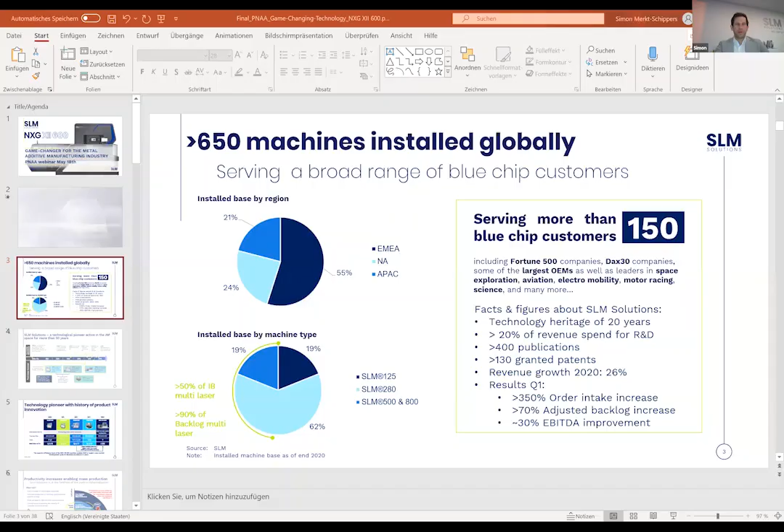Thank you very much, Brian. I'm very happy to hold this webinar to speak about our flagship. Let me share my presentation that I have prepared for today, and let's speak about our latest machine. You can see the slides.

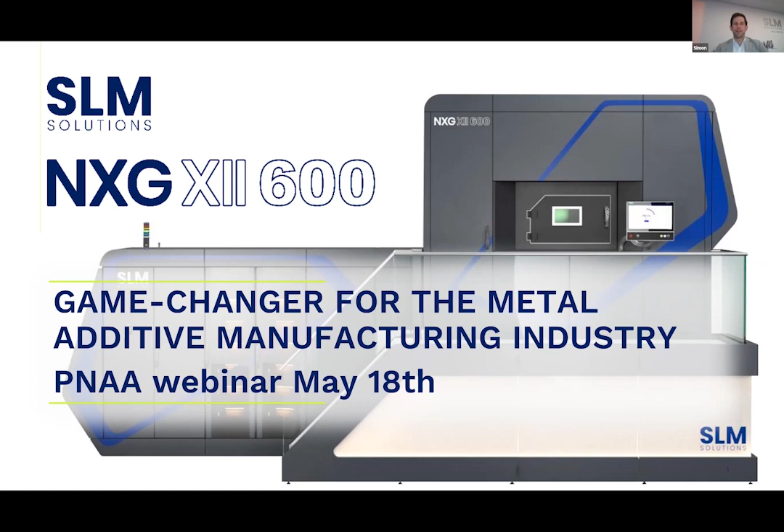I would like to start with a short video of the machine. It's a video that we showed during the launch event we did in November to present our new flagship to the world. So please enjoy.

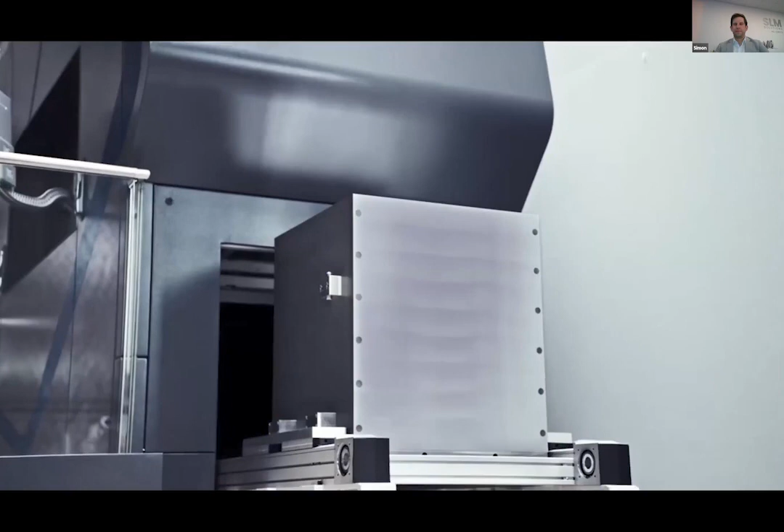All right, before we jump into the details of that machine, I would like to shortly introduce you to SLM Solutions. We are one of the leading metal AM machine manufacturers, providing machines for selective laser melting technology. We have around 650 machines installed globally, serving a broad range of blue chip customers from various industries, including aerospace customers like Rolls-Royce, Safran, Honeywell, and UTC Collins in our customer base, and we are very proud of this.

Some facts and figures about SLM Solutions: we are the co-inventors of SLM technology in the late 1990s, so we have a technology heritage of more than 20 years. We spend a lot of our revenue on R&D to keep our technology leadership. We have filed a lot of publications and been granted a lot of patents in the last 20 years to secure our technology leadership.

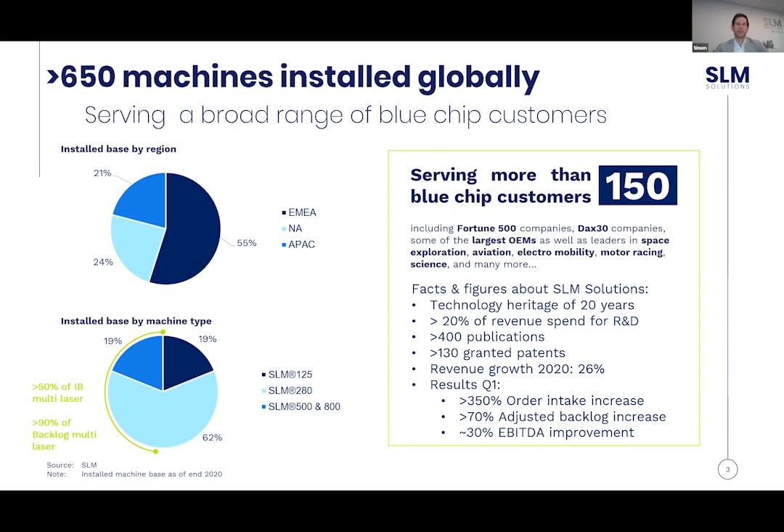This is our current product portfolio that we offer to the market. It's an evolution from 2009 to now. We have the SLM 280, a mid-size machine in our portfolio, which we brought to market in 2009 as a single laser machine. Then in 2011 we upgraded it with a twin configuration, equipped with two lasers. We brought the SLM 500, a machine with a larger chamber size, to market in 2013, equipped with up to 4 lasers working in parallel. Then in 2017 we brought the SLM 800, equipped with a large Z axis to print even larger parts. And our recent addition is the NXG XII 600, equipped with 12 lasers.

So it's really a large step towards more productivity, higher productivity, but also towards larger build envelopes, as this machine features a build envelope of 600 millimeters cubed.

For us over here on this side of the pond, that's about 2 feet cubed. Does that sound about right? 600 millimeters is about 2 feet. Cool, that's a pretty big size, a pretty good size 3D printed part. It's like an oven, like you'd have in your kitchen - the size of a big oven. So you can fit quite large parts into that machine, right?

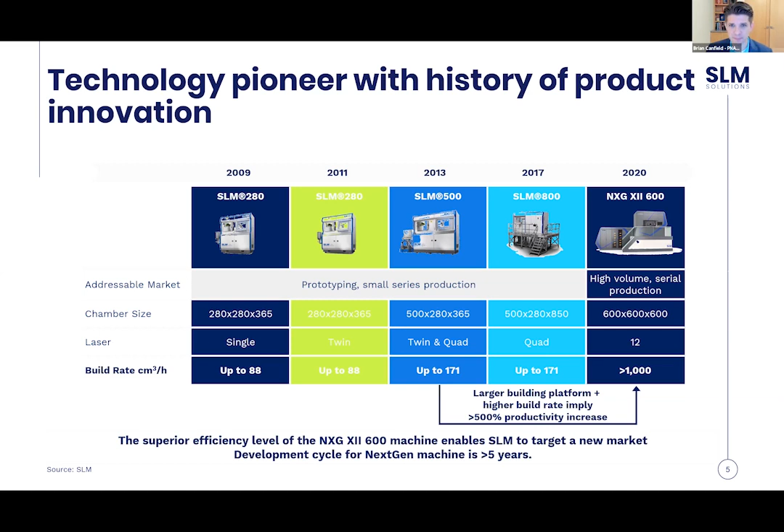Let's talk about a bit more detail on this machine. It's 20 times faster than a standard single laser machine, and 5 times faster than an SLM quad laser machine, which was, before we launched this machine, the most productive machine in the world. It's designed for serial production and optimized for large parts and high volume production. Each of the lasers has 1 kilowatt, giving a lot of opportunities to increase productivity by working with higher scan speeds.

So again, typical machines out in the market are equipped usually with 400, 500 or 700 watt lasers. Here we equip the machine with 1 kilowatt to get even more productivity out of the machine. There's also a new function that we introduced, a zoom function. So we have a variable spot size on this machine. We can vary the spot size on the fly, allowing you again to increase productivity of the process. So it's really a machine designed for serial production, and definitely the most productive machine in the market you can find.

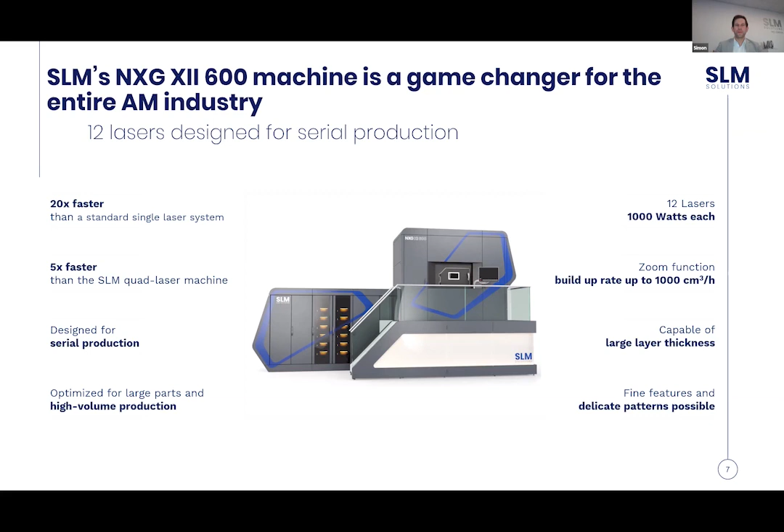Yeah, this slide also shows it. We have compared our machines with our competitor machines. You can see that here on the left side. Our competitors' machines in terms of build rate are typically below 150 cubic centimeters per hour. Our existing machines, the 500 and 800, equipped with a quad laser configuration, can already deliver quite high build rates of more than 150 cubic centimeters per hour. But if you look on the right side, the NXG XII 600 is providing a massive increase of productivity of 500% over the latest state-of-the-art machines, which is quite impressive.

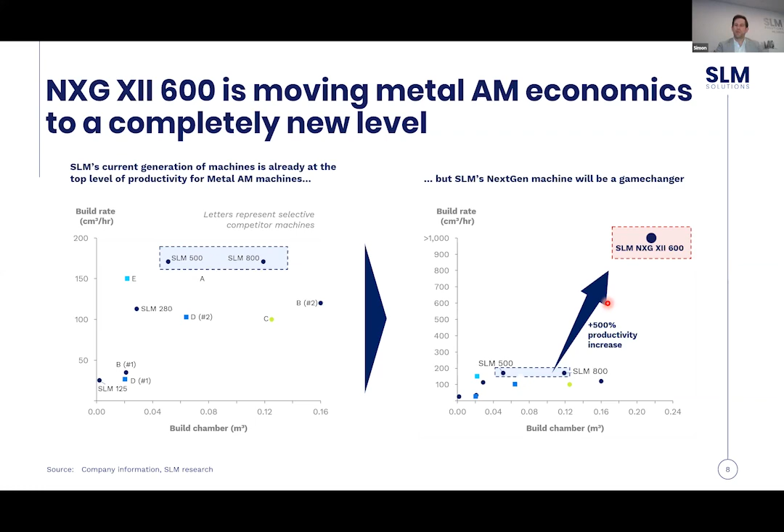This application was made from Inconel 718 material, a nickel-based super alloy that we can process perfectly in this machine. It has large dimensions, so it almost fills our complete build envelope. And we were able to produce this part in less than 70 hours, which is already quite a good result. We had a build-up rate of 207 cubic centimeters per hour in this case. We were not using the full laser power, only a 350 watt parameter set. So we expect much larger build-up rates, at least a factor of 2, if we use high power parameters like 750 watt or up to 1000 watts.

So this is quite a nice example from the aerospace industry, and we hope to get more of these kinds of applications from our potential customers.

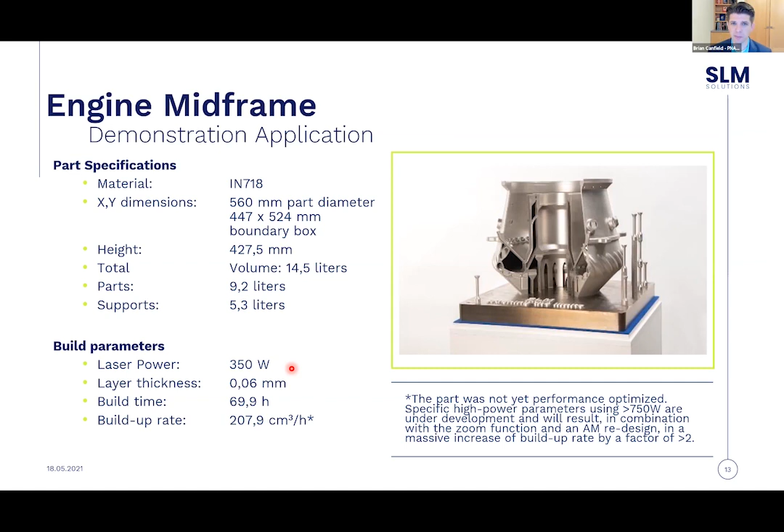Hey, Simon, can you go back one slide? Sure. Can we kind of geek out and talk a little technical talk for a moment? Are you okay with that?

Sure. So for those that may not know this, either on our webinar today or watching this video later, Inconel is a really challenging material to machine. Simon, is that a fair assessment? Yes, it is. Processing it with conventional technologies like machining creates a lot of wear on the tools, so it's really hard to process conventionally. Here with our SLM technology, laser powder bed fusion, we can easily weld it together as you see in this part. There's almost no scrap; we can recycle the powder which is not molten and reuse it for the next process. So Inconel and nickel-based alloys are a super material for our technology, with a lot of advantages compared to conventional technologies like machining.

I can't give an on-the-spot quote for what this part would cost if you could manufacture it conventionally, which you can't, which I'll speak about in a moment. But we're talking an extremely expensive part. I couldn't even begin to guess, tens or hundreds of thousands of dollars, if not more. The other thing you see here, and correct me if I'm wrong, Simon, is the passages, those rounded curvatures along the side. These are hollow tubes. There's probably no way a conventional subtractive process like a mill could actually make some of the features on this part. Is that correct as well?

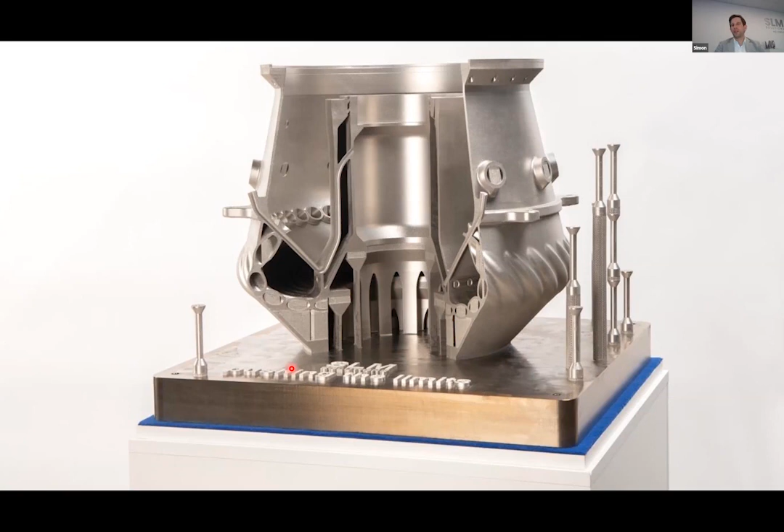And then all in all, we have actually reduced the assembly work by around 40 working steps in producing a functional integrated part in one step. So that's a really cool example, and we are really proud to cooperate here with Porsche on our NXG XII 600 machine.

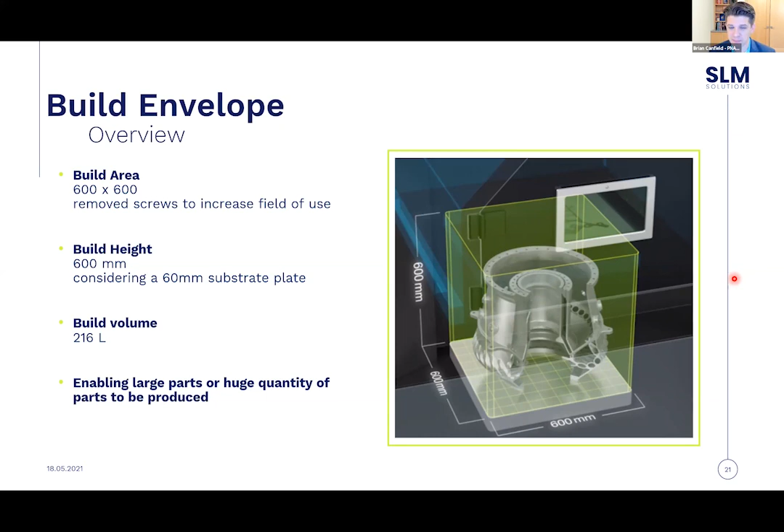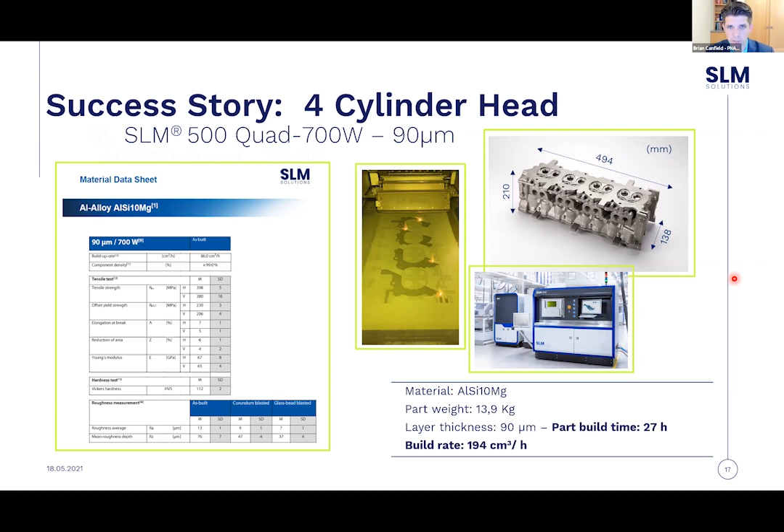Okay. Yeah, and I think you mentioned, it's something for the audience if they weren't aware of this already, like that transmission housing there, or that assembly. I think you mentioned that you reduce the assembly time, and I think that's one of the big takeaways here: you could have a large assembly where normally you're coupling different parts or assemblies together because that's as big as you can make them, or they're coming out of the casting. With this technology, you could actually integrate all those into one large part, as long as you can get in there to do what you need to do, right?

Exactly, and that's a massive advantage. And for this, you need to know how to design for AM to make it a functionally integrated part. For this, we have trainings in our portfolio to teach our customers how to deal with design for AM. We also have very experienced application engineers that can support customers in redesigning a part for our technology, to profit from exactly these capabilities.

Okay, we got another question that came in. What applications in aerospace manufacturing are you targeting? Lighter weight aluminum parts versus lighter weight carbon fiber? I suppose they both have their place in planes. How do you compare the two options for an aerospace engineer?

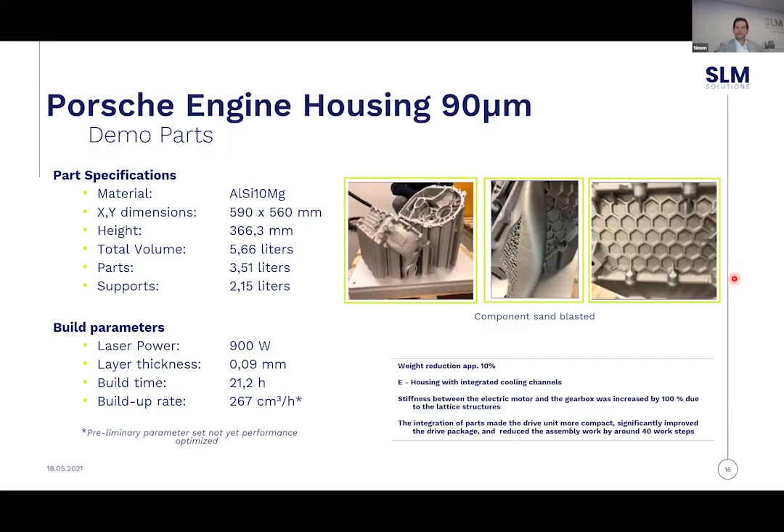All right. Yeah, let's continue. I mentioned the zoom function. So this is the first machine that can on the fly change the laser diameter. Typically machines cannot do that. You have to stick to one laser beam diameter of, let's say, 80 microns, for example, and you have to run this diameter across the whole build. Our new optical setup that we have developed allows us to change the diameter on the fly.

So this again gives more options to increase the productivity of the process, as we can produce bulky parts of the geometry with a larger beam diameter. So we can increase the melt rate there a lot. So again, a big opportunity to increase the productivity and also the throughput of our machine. And Simon, what would be the drawback to going to a wider beam versus the more narrow beam?

Yeah, sure. With a wider beam, it's not possible to manufacture filigree parts, and also a wider beam might result in a slightly worse surface roughness of the parts. So typically, you use a wider beam more in the inside of the parts, and the contour and the outer shape of the parts you rather melt with a small beam diameter, where you need the accuracy and the good surface quality. Okay, great, thanks.

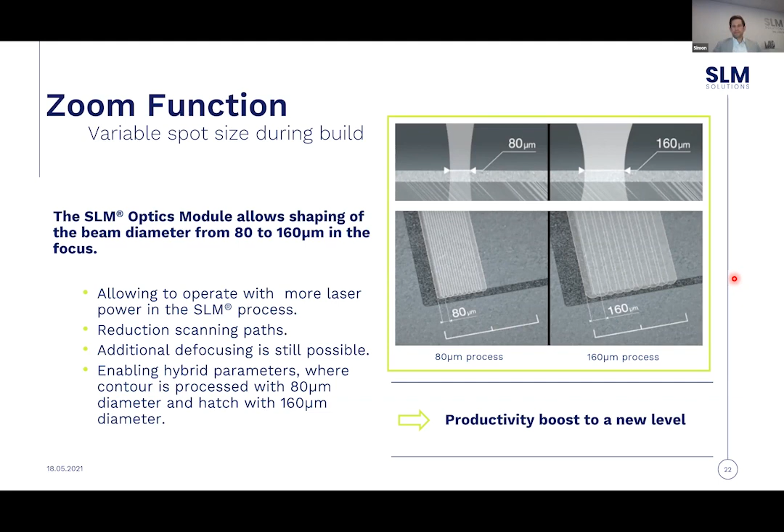Yeah, in terms of software, our machines always come with software for data preparation, but also for quality control. Our machines are equipped with a lot of sensors to monitor all process-critical parameters like oxygen level inside the machines. So we can track all this, and we can also visualize this in our additive quality software.

We have an LCS, a layer control system. That's actually a camera that sits in our machine that is taking pictures from the various layers that are deposited. And this system controls the quality of these layers. So was the layer completely deposited? Are there any defects in the recoater medium that might result in a layer that is not homogeneously spread over the build envelope? So all this can be detected by our layer control system.

Then we have a melt pool monitoring option. So there we monitor the melt pool of the part that we produce. We detect the signals that come from the melt pool, and we can clearly detect where we have a solid melt pool. We can also detect overheated melt pools. We can detect lack of fusion. So if, for example, the laser was not melting a certain area of the part, the system could detect that. So it's quite a cool feature for our machines in terms of, let's say, quality control.

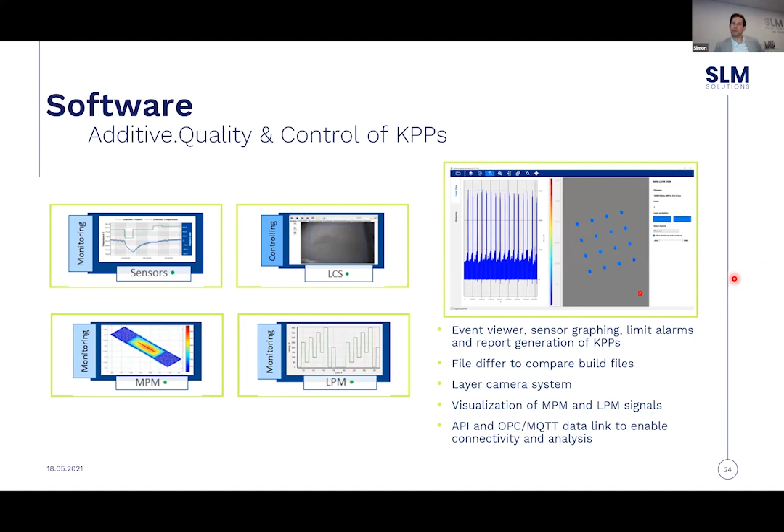It sounds like basically any type of metal that would be used in an aerospace application. Yeah, basically everything. For sure, there are some more exotic materials like titanium aluminide, for example, which is not easy to weld. We are also working on that, but we can cover most of the common materials from aerospace industry. That's correct, Brian. Great, thanks.

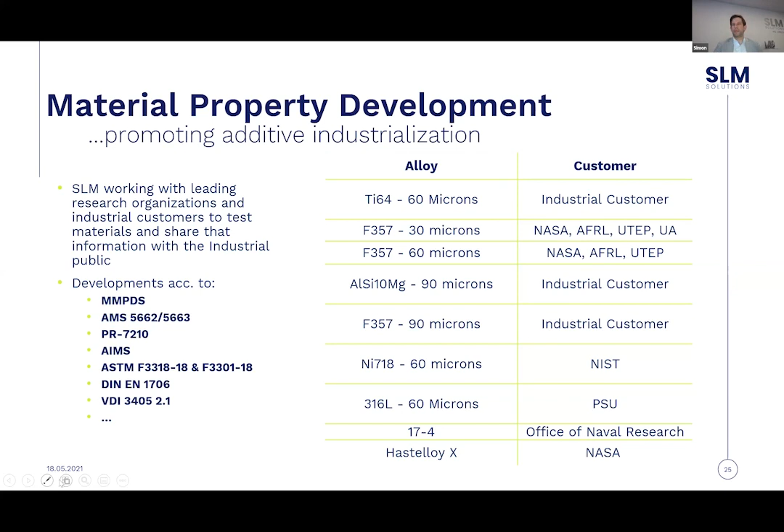And then, my last slides for today, some voice of the customers about the NXG XII 600 machine. We just started selling this machine, but we have tremendous feedback on this machine. Every week we have multiple customer visits here on site, even though COVID-19 is still going on. I would like now to present some voice of the customers. The first one is from Porsche. You saw already the engine housing, and unfortunately the video is in German, but there is an English subtitle, so you can follow the video.

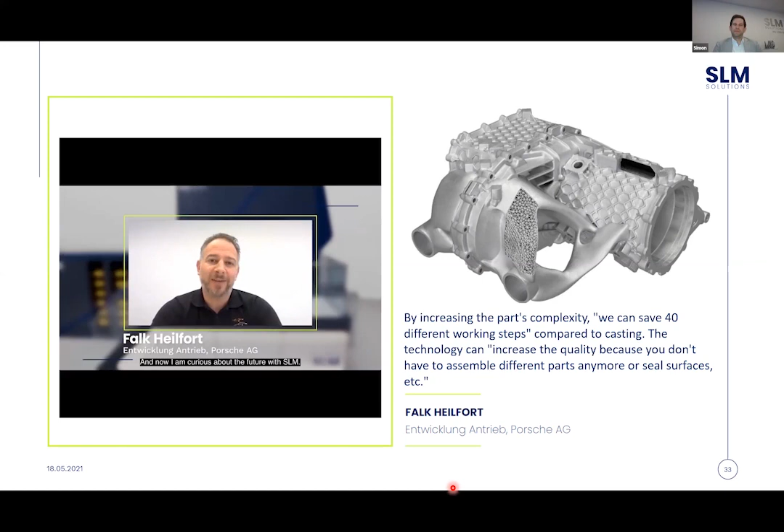So again, we are very proud to work with this leading automotive OEM here in Germany. Yeah, it's just great, and I think they will profit a lot from our technology in the coming years.

Simon, we've got another question that came up. Since the layers are sort of rolled out before the sintering process, is it possible to layer with one metal and another layer with a different metal, creating a welded bond between the two layers?

So actually, if I got it right, the question is regarding a two material process, and actually we are currently developing an upgrade kit for our existing machines to go for two material process. So yes, it's possible. We have already proven the capability to process two materials in one process. For example, combining steel and copper in one part.

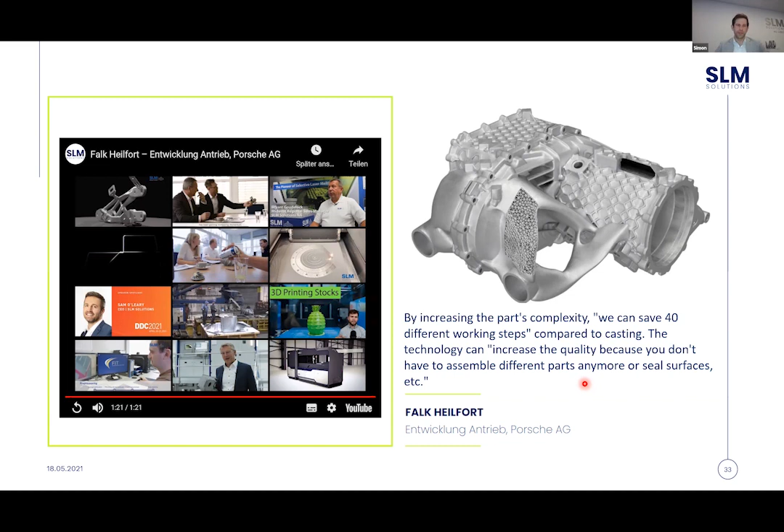So yeah, if you like, I can try. Actually, I can try to, if I have that in the backup of my presentation. Here you go. Can you see that, Brian?

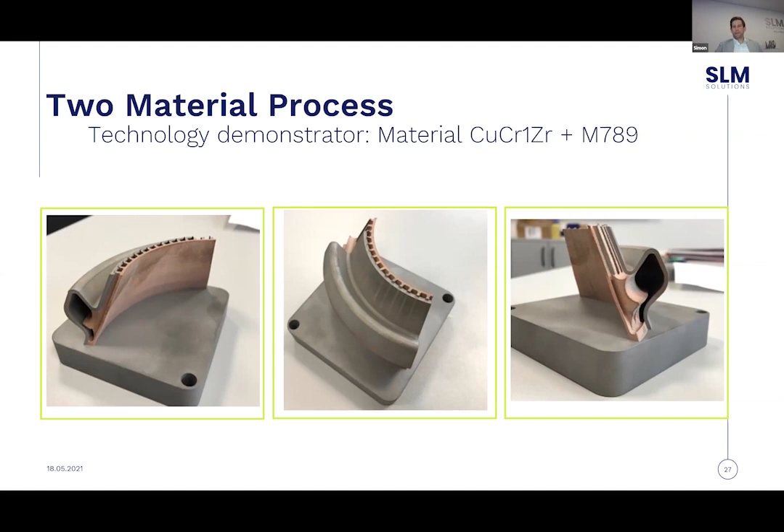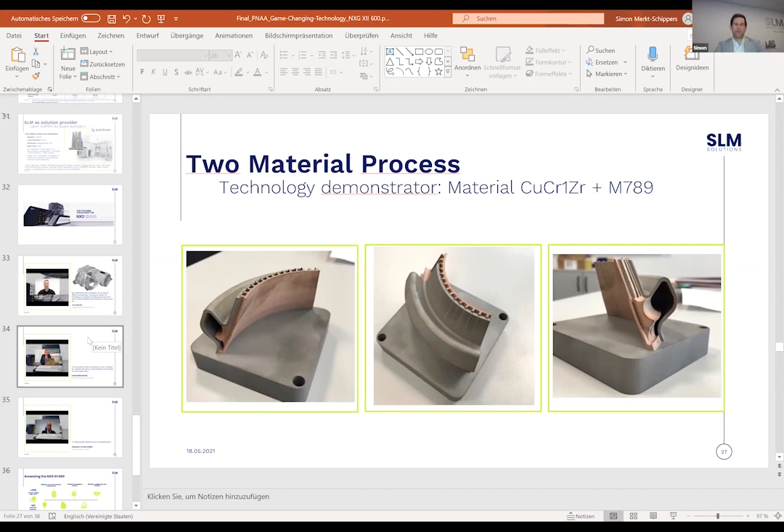Very interesting. That's pretty incredible. It is. I was very pleased to see this coming out of our engineering group and our NTI group. So it's really amazing to see the first parts combining two materials.

Yeah, another voice of the customer comes from one of our Italian customers, 3DNA. They are one of the leading service bureaus for metal AM in southern Italy. And let's also listen to 3DNA here, what they say about NXG 12600.

I do believe that with AM, 3DNA will manage to give an exhaustive answer to the production needs of aerospace, automotive, and energy markets. This, in brief, means higher productivity, cost per part reduction, and shorter lead times. SLM 600 next generation machine is definitely raising the bar in terms of productivity and cost per part reduction. 3DNA is confident in next years to conquer market share through the deep introduction of metal additive series productions.

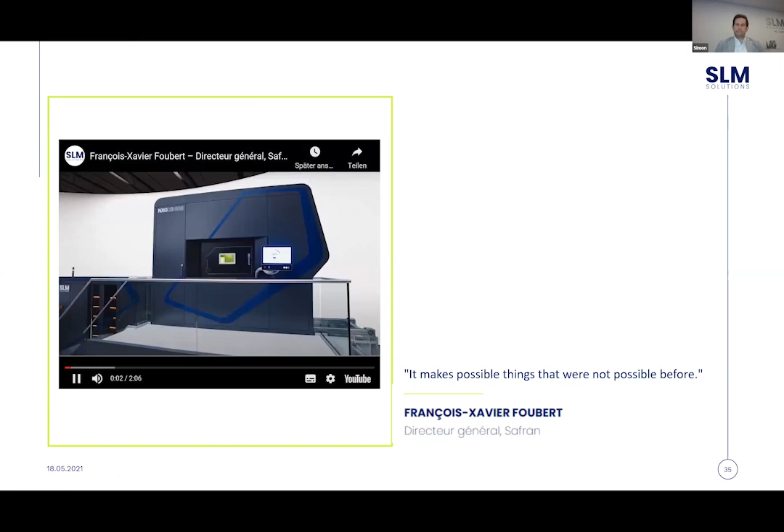One of the reasons we believe strongly in the additive industry is that it makes possible things that were not possible before. And particularly, if I think about engine, we can think about configuration of engine that are not possible today with classic manufacturing processes. So why additive manufacturing for us? Bringing new technology to the market to better have our product respect the challenge of moving the people safely, but respecting the planet. And second challenge is bringing down the cost.

And so how Safran has decided to take this challenge, we have decided to launch a real serial production on aeronautical parts by building a new factory in Le Haillan. Challenge for Safran is building new type of parts and bringing productivity to our customer. For that, we need a plate that can allow us to bring new parts that were not achievable with current size of the machine, which is a first point. And second point, we need to have at the same time quality of the product plus productivity, and having an important number of lasers plus powerful lasers. It's a way that we definitely think is the right way to make the challenge we have a success. And for that, the machine looks like a good promise.